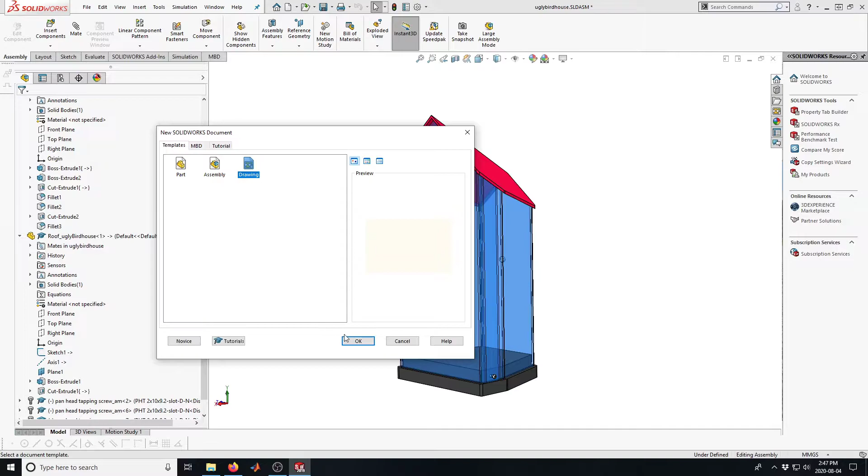What I'm going to do is to create a new drawing. Now remember, a drawing is a two-dimensional sheet of paper essentially. I'm going to pick a custom sheet size, and my custom sheet size will be 24 inches in width and 12 inches in height, because that's the bed of our laser cutter.

So I've got this window opened up, which has the sheet size and kind of brownish, and then this rectangle is what SolidWorks thinks is going to be my first sheet view. Not sure why that's there, but we won't worry about it just at the moment.

So I'm going to go to Model View, and you can see here that in my Model View there's Ugly Birdhouse. I'll pick that, and I want a solid part. And you can see that when I do that, this window opens up for the model view where it shows me multiple views, and I've got some more views here.

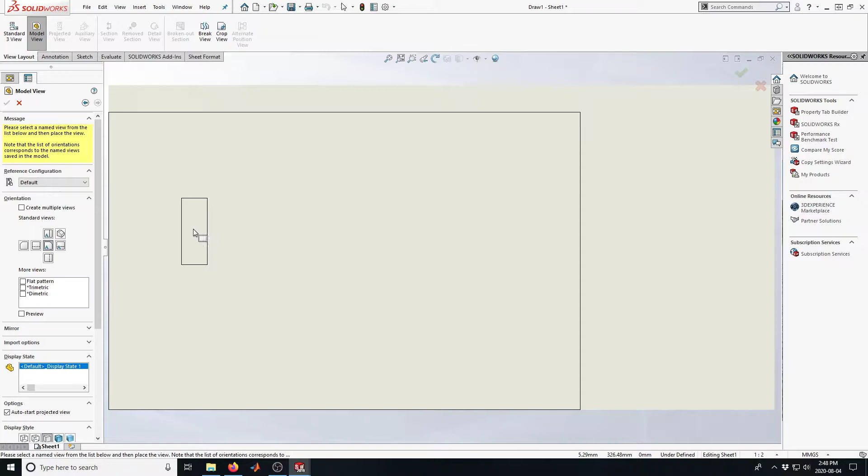And because I want to make a flat sheet for laser cutting, one of the choices, because I'd already made this part as a folded, essentially sheet metal part, is flat pattern. So if I check flat pattern there, and if I scroll down to my scale, because I want to cut this out full scale, I'm going to pick 1:1.

And now, if I go and set that up there, oops, I get that. Now I guess these were some random views. Undo that. Yeah, and I don't want this view. There. So I've got this flat pattern of the birdhouse. So I could get this laser cut.

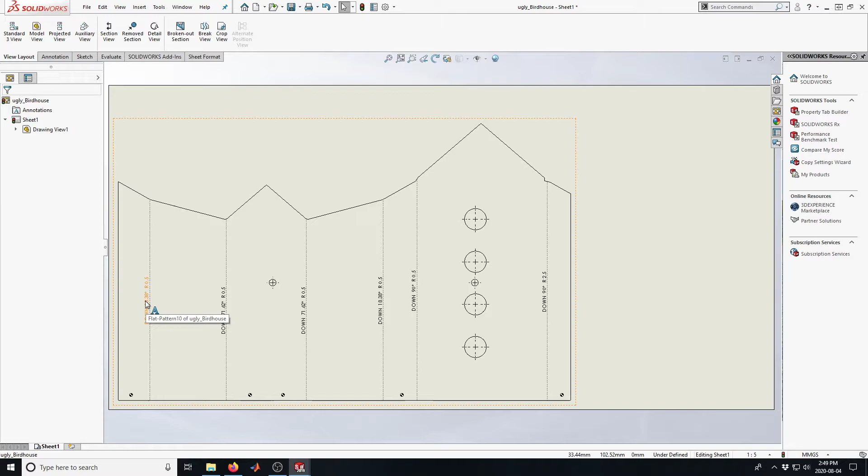Now, as you can see, there's these notations here, which I probably want to hide, just so that the laser cutter doesn't cut them. You can print them out. You'd have to change the line style, that's all. But just simply, for the sake of making this easy, just get rid of them. So that's one part. Now we've already done this, so you've seen this effectively already.

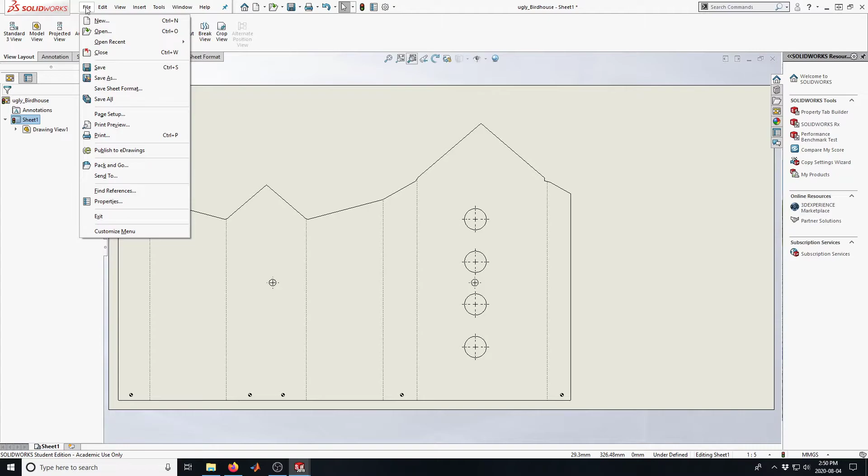However, where I'd like to go with this is I'd like to lay out some other parts, i.e. the roof, so that I can laser cut the roof at the same time, and I'll have all my parts come from the laser cutter ready to assemble. So if I save this first, I'm going to save this as cut sheet, just so I don't lose what I've done. And then I'm going to reduce that. Models have changed. Yeah, don't care.

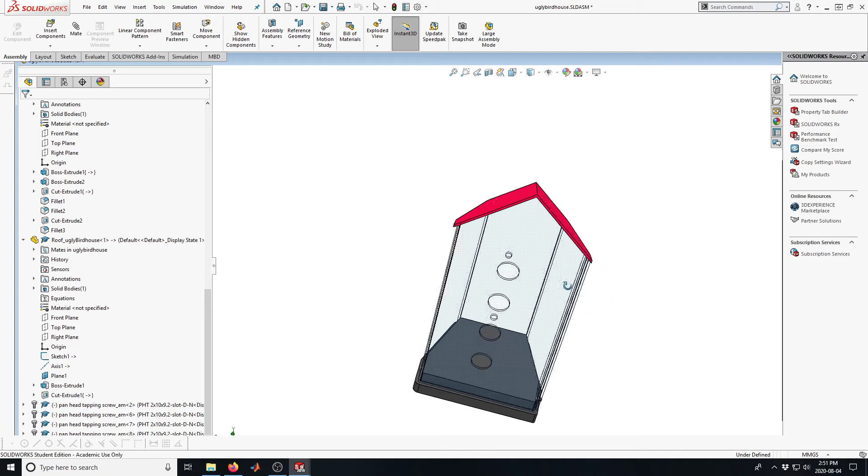This other part that I want to make into a folded laser cut sheet is this roof. Now, you would think that this is going to be easy just as it is. However, I haven't yet made that into sheet metal or into a sheet. I've just left it as I created it. So in order to get set up to do a laser cut of this part, I need to go and make a flat pattern of it.

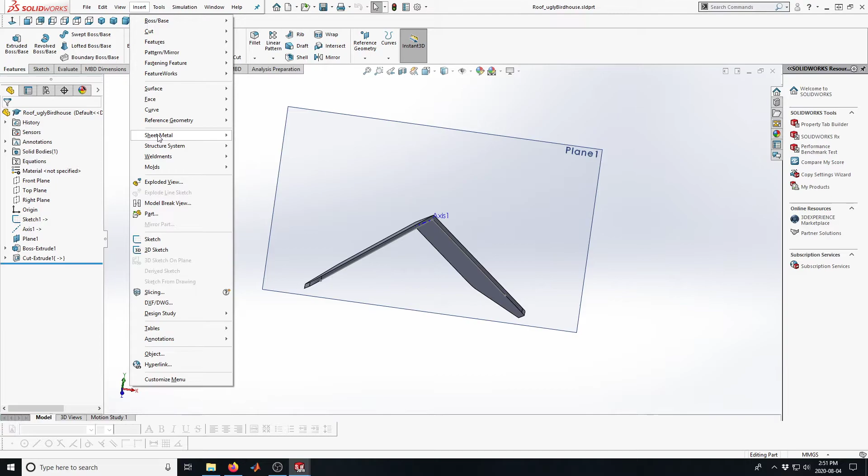So here we are. I opened up the part from within the assembly, and I can go up to Insert, just like I did once before with the body of the birdhouse, and I'm going to go Convert to Sheet Metal.

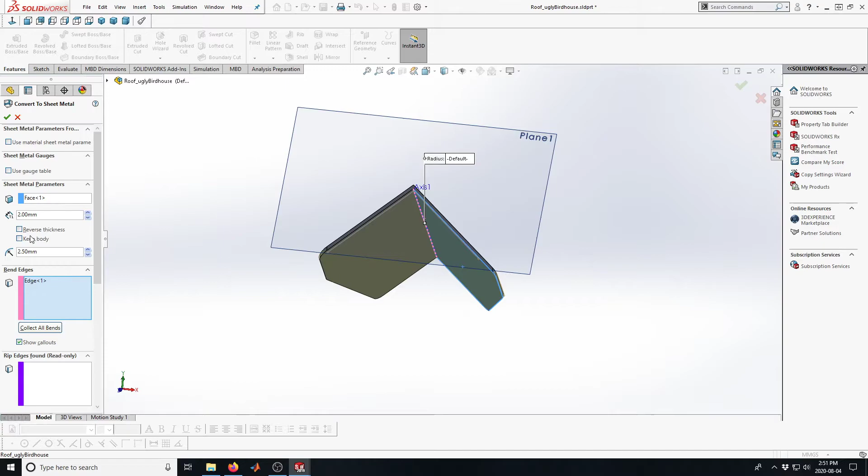Now it wants me to select a base first, and I'm going to pick that face as my base. It wants me to pick a bend edge, so I'm going to pick that edge to bend. All the other parameters are fine, and so there we go. So that now is a bent piece of sheet metal.

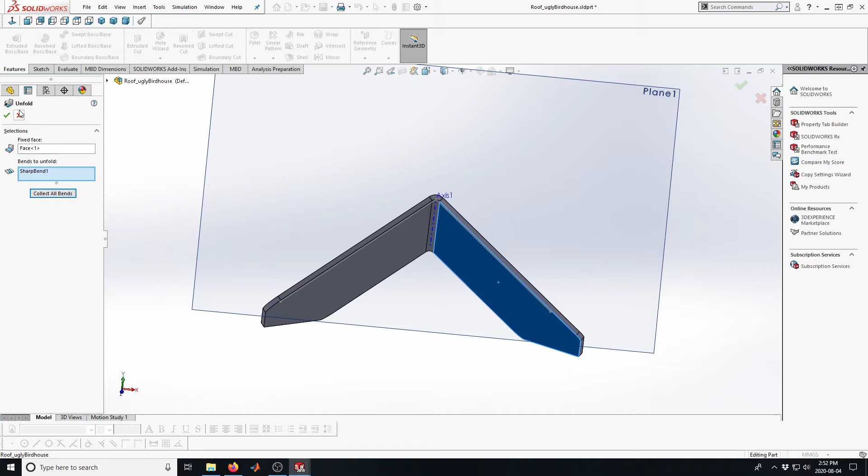Now look at what it's done. It created these now hidden things here of the flat pattern and the bend. I can go up to Insert, and I can unfold it. I can pick that as my fixed face, collects the bends, and boom, I've unfolded it into a 2D version of the 3D part. But that shows up here on the feature tree as like a whole separate feature.

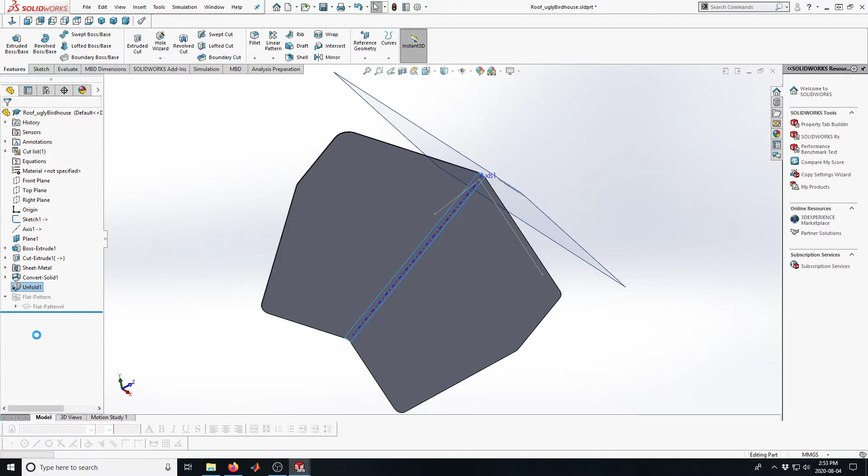And what will happen if I simply save this, the solid assembly from this part will think that it's an unfolded sheet, and so it will reflect that in the CAD model, which isn't exactly what I want. Try it yourself, you'll see what I mean. So I didn't really want to unfold it. Whoops, didn't want to unfold it. Just going to delete that feature, and I'll leave this flat pattern feature as it is, and I'll save the document, and I'll close out of there.

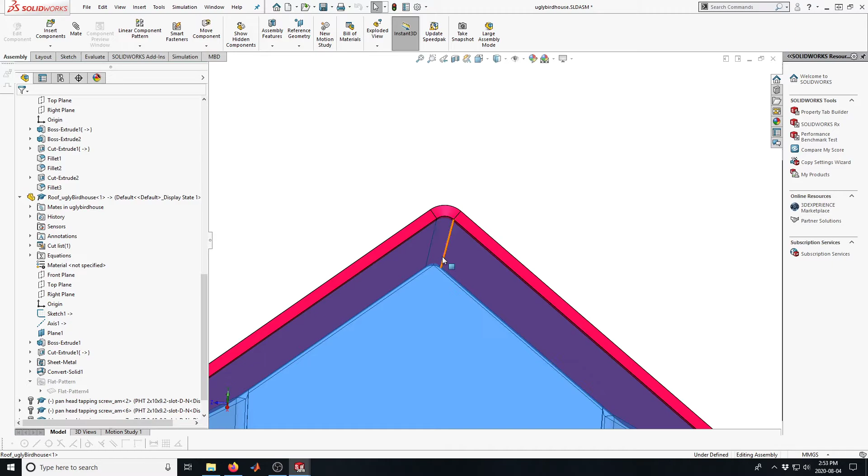Yeah. And now nothing has changed in my assembly, except you can see that now this top piece is a curve, indicating that yes, I did something to this. I actually made that into a folded sheet metal thing. Now, okay, so that's done. Now if I go back to my two-dimensional sheet, just going to rebuild that, and it shouldn't change.

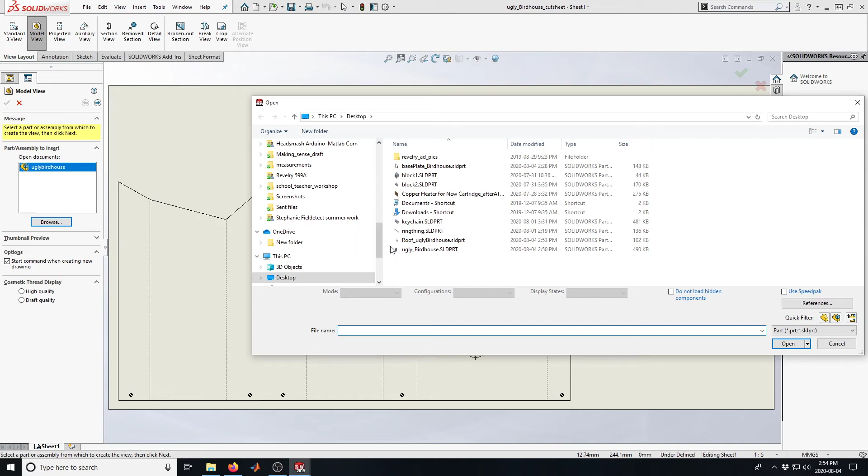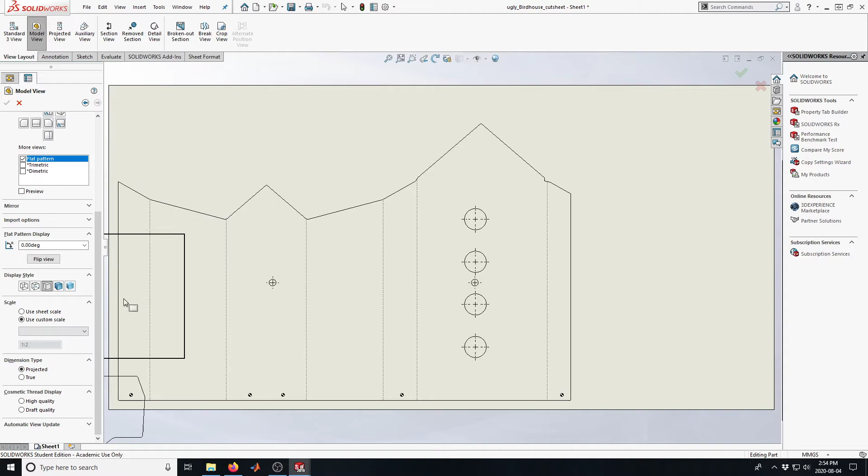I want to add a new model view. So I just select model view up there. I'm going to browse, and I'm going to find the roof of the ugly birdhouse. There it is. And you'll see, just like with the first time, one of the choices was a flat pattern now. I've picked that. I want to use a custom scale, which is 1:1. Don't know why this is, there we go. It's a little bigger. I'm going to hide this.

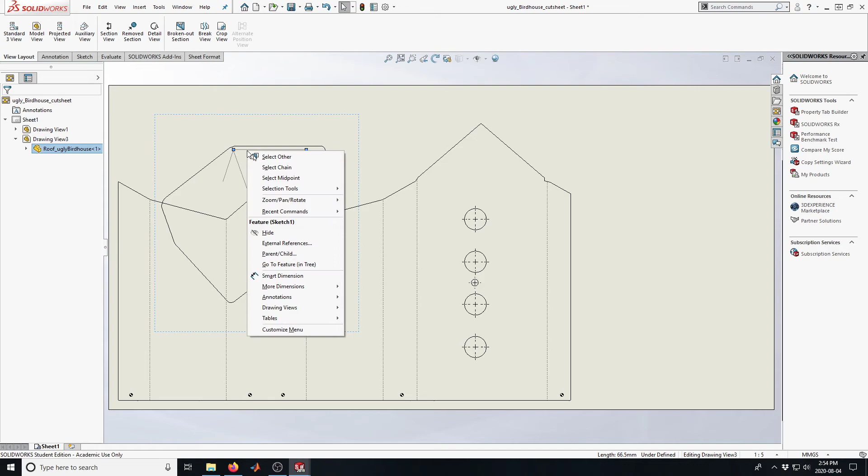And somehow the sketch that was in my drawing has shown up too, but that's okay, I can hide that too. And you can see that I've got my flat pattern. Well, now I can slide this around wherever on the laser cut sheet it needs to be. That will fit, so I can put it over here. Now if I've got other smaller pieces, I can also add them to this sheet, and then I can save this as the drafting file, and our technical staff can take that drafting file and can laser cut it for you.

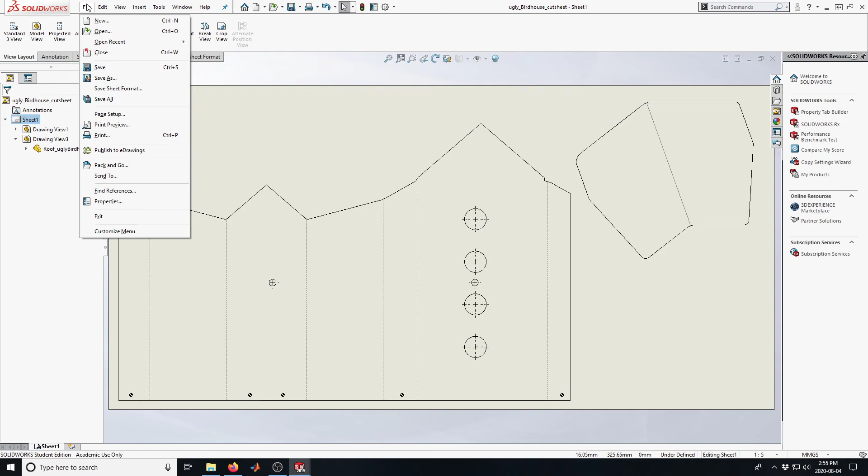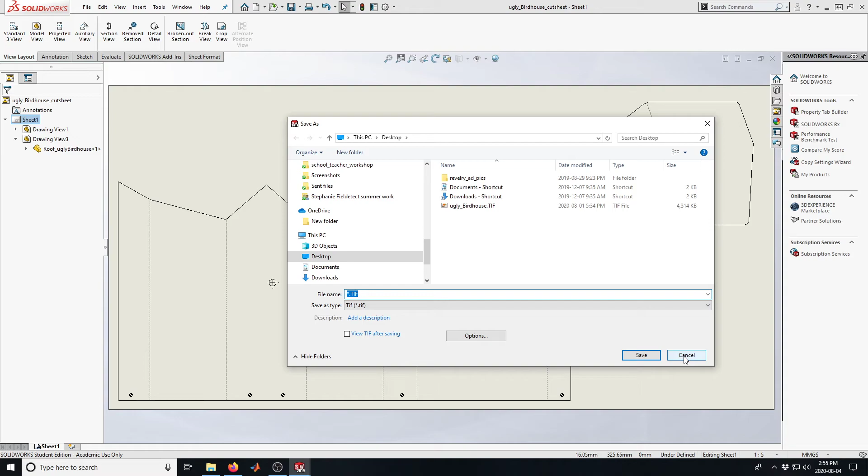Or I could save it as a more standard format like a DXF, or I could save it as a TIFF. Either of those formats will work just fine. DXF is fine, or the native drafting file is fine. And then you'll export that and send that to the technicians according to your instructor's steps, and you can get those parts laser cut. Laser cutting takes only a few minutes on the machine for something like this, to get a laser cut panel that is extremely precise and easy to work with.

You can laser cut in a number of different materials with the Epilog laser that we have in the Faculty of Sustainable Design Engineering, FSDE. You'll find that we have several different options for what materials you can pick, but for starters, just the basic cardboard is a great place to start. If you've got a model that has some differing demands and you've tested it before, you can cut in acrylic, you can cut in thin plywood, lots of options. So there we have it. That's making a manufacturable output in terms of a laser cut sheet.